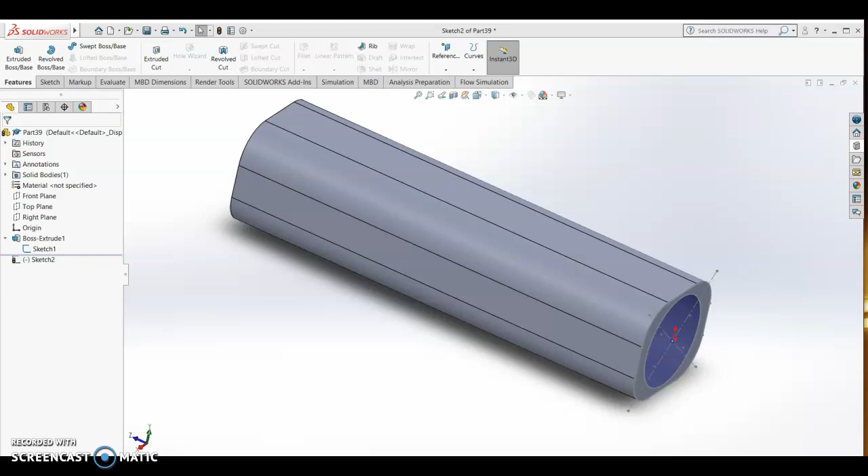In this video, we're going to draw a tie rod end. We know that the diameter of this threaded part of our rack end is 10 mm, so I'm going to make a threaded hole of 11 mm. So open your part. Okay.

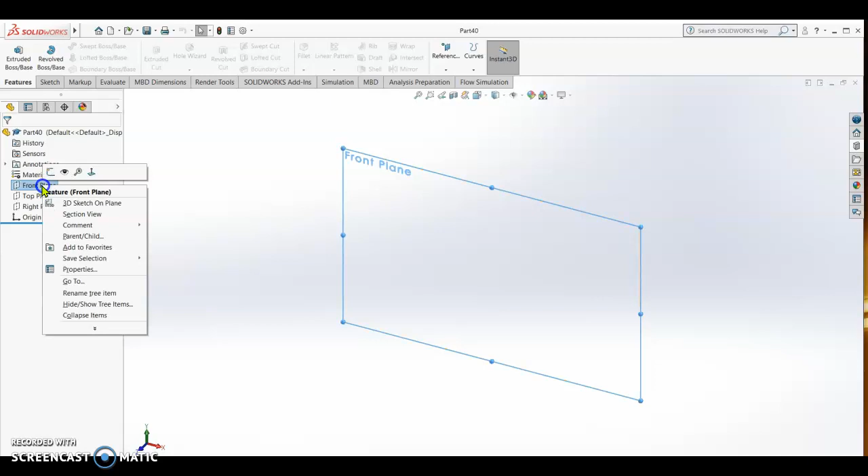On the front plane, we sketch a circle. Okay. Smart dimension, we put in 11. Enter. And then we use this center. We draw a rectangle. We put the dimension here 14, and then we put the dimension here 12.

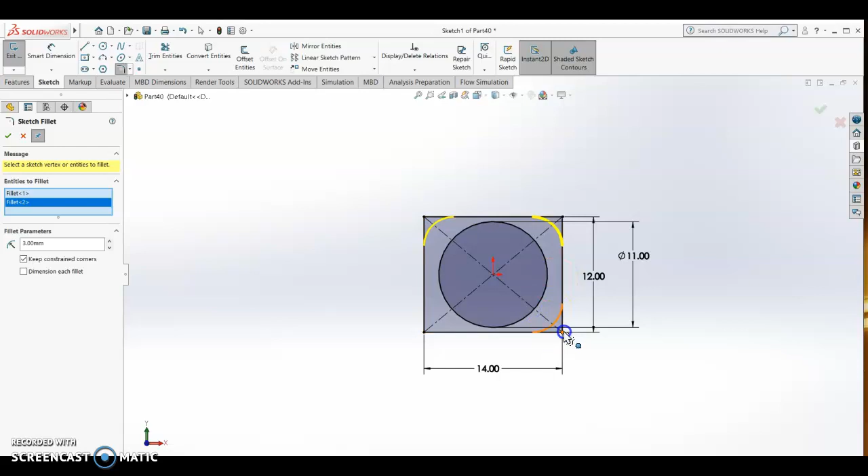Alright. And then we fillet the corners. We fillet it by 3. Okay, 3. Alright, check. And then features. We extrude boss base by 50. Okay, check. So this is our extruded boss base.

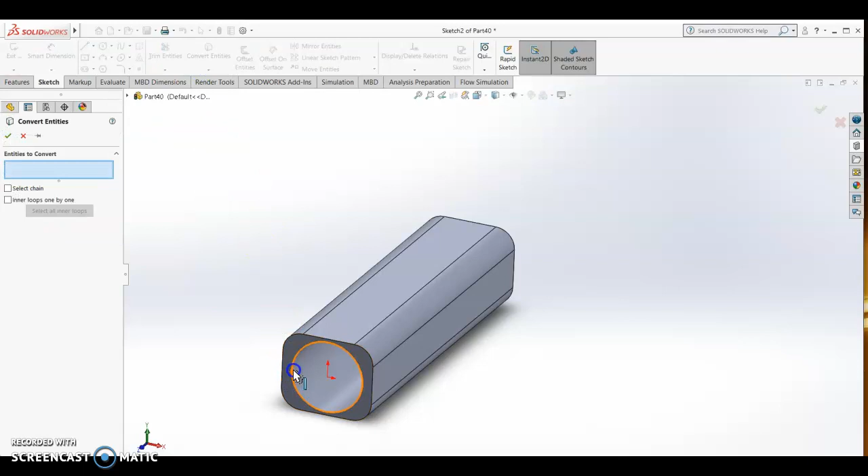So I sketch on the base and then I convert entity on the edge. Check. And then we go to features and insert a helix. The same thing, it's 1 mm pitch. Okay, check.

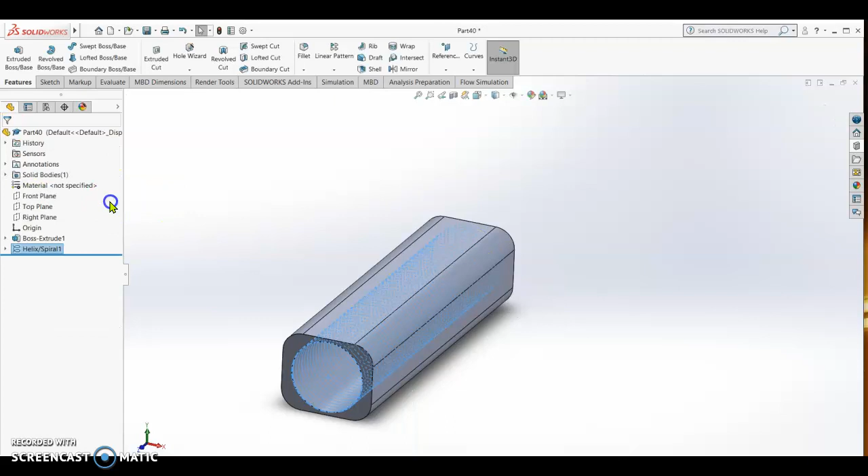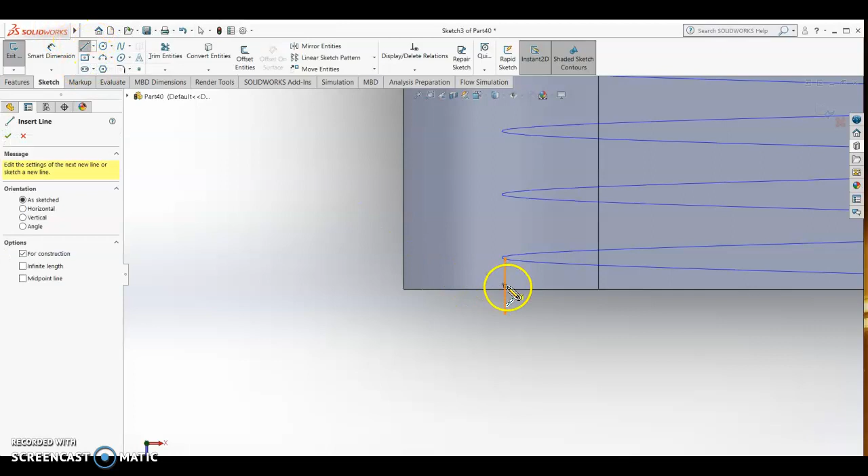And then on the top plane, we're going to sketch the profile of the thread, similarly to what we did on the tie rod or rack end. Okay, normal to. Sketch. We draw a line. The line must be touching this helix. All right, and then we draw a center line. So we put the center. All right, and then we draw a line.

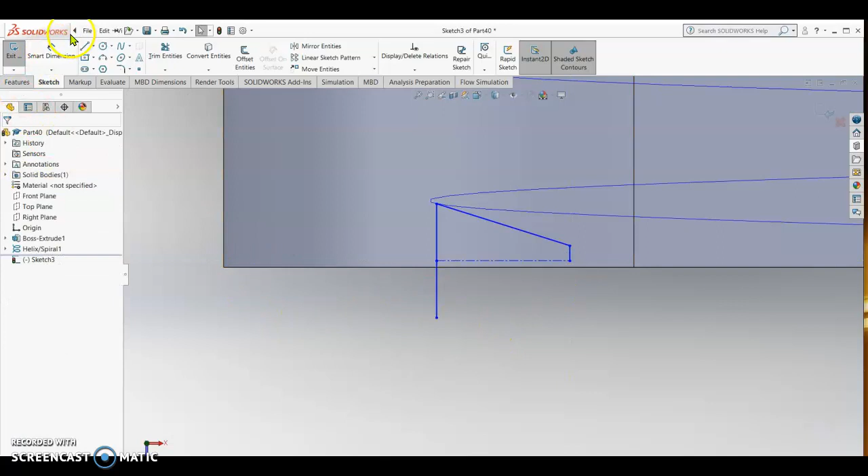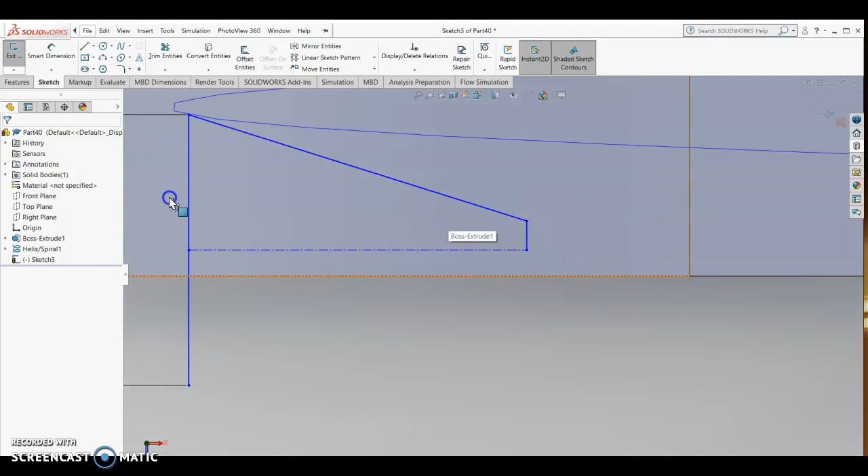So this should be 8 mm, smart dimension. We put this as 8 mm. Wait, undo. It should be 0.8 mm. All right. And then this one should be 0.1, or we just mirror first. So we mirror entities. We use this line, and then mirror about this line.

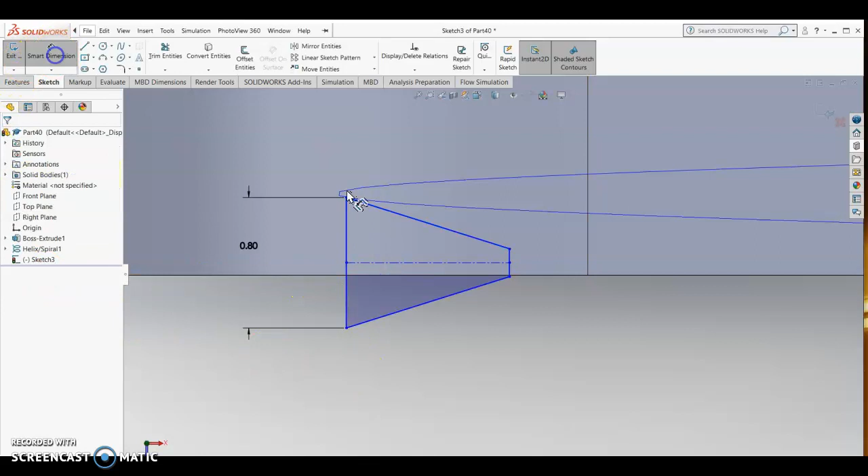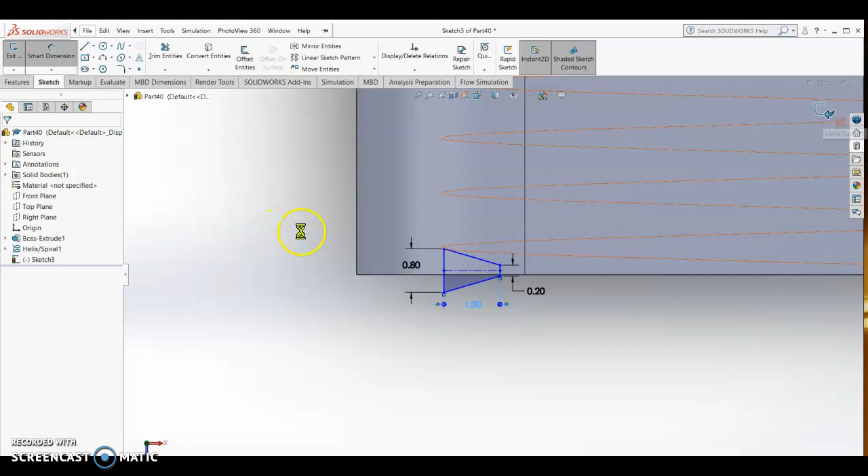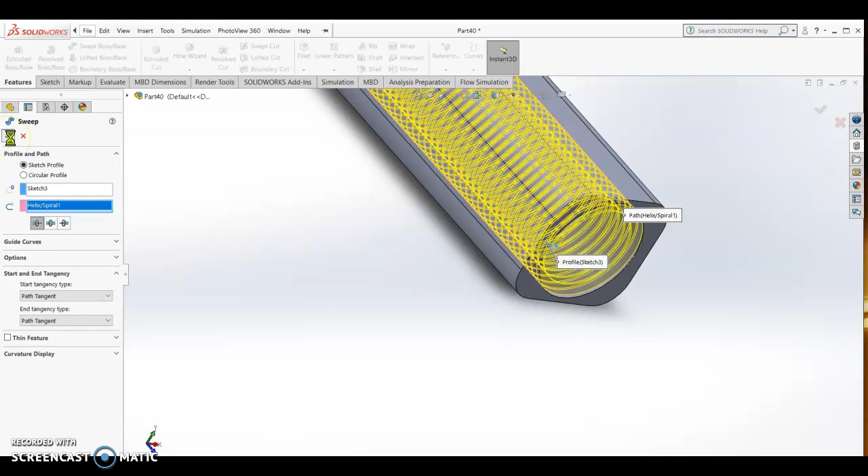Check. Smart dimension. This should be 1 mm, or 0.2. Okay. The height should be 1 mm. Enter. Once done, we close the sketch. And then we go to features, swept boss base, and select the helix. Let's see the thread. Now it's done. Okay, check. Alright, we got the threaded hole on this block.

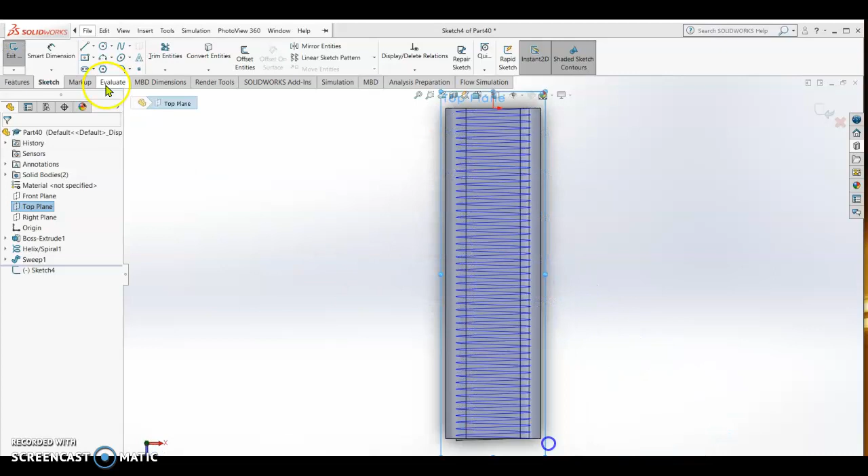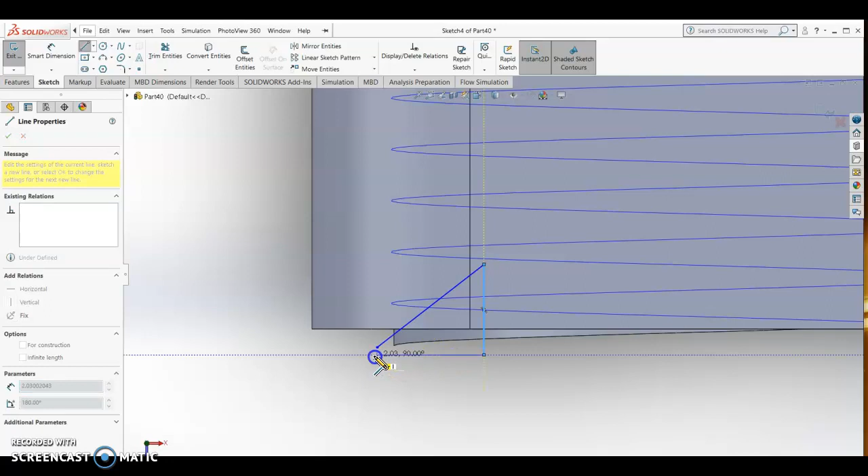Right, we chamfer on one side, so we still sketch on the top plane, sketch, normal to. Then we are going to cut. So I want to cut a line. Okay. So I'm going to draw a center line so that I can make a revolve cut. Okay, check. And then features, revolve cut.

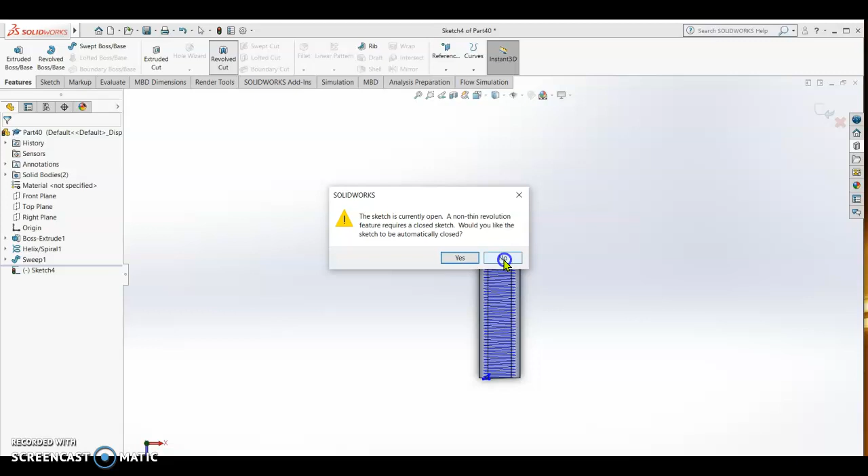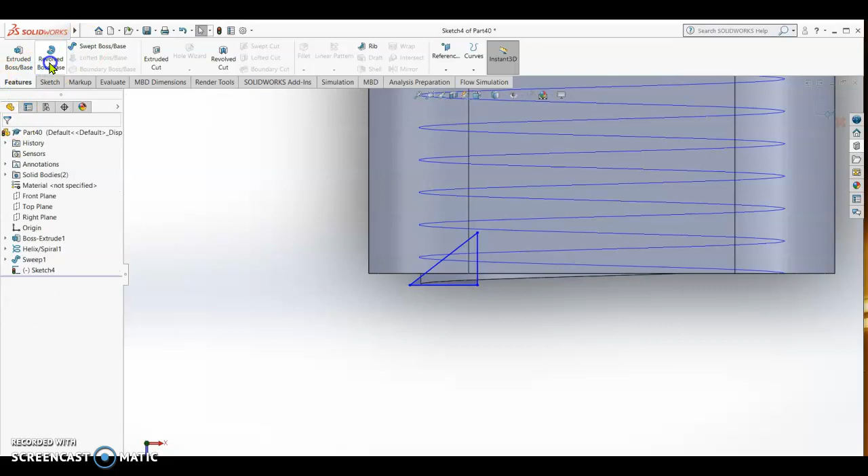Okay. Now we see, oh, it's not connected. So we have to join first. Close. This is the sketch. Let them merge. All right. And then check, and then revolve cut. Okay, it's cut already. Check. So now it is cut.

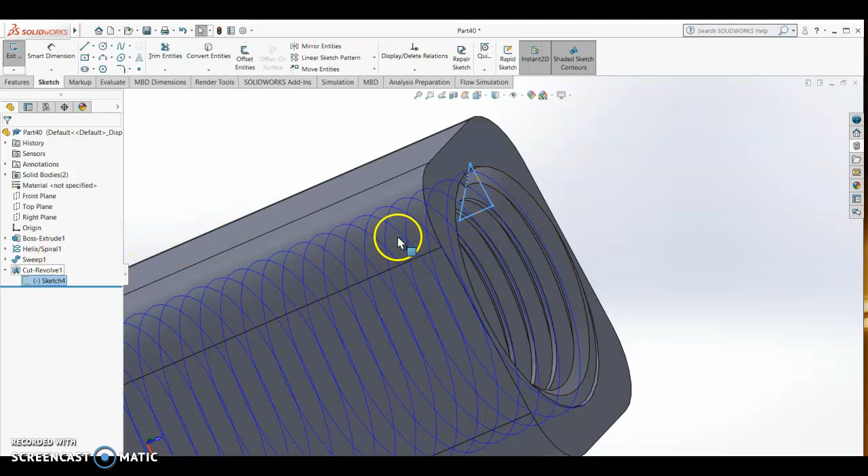Okay, we can increase that cut. We can edit some more. Edit sketch. I want this cut to be deeper. Okay, close. All right. So now it's cut so that the thread will be nice.

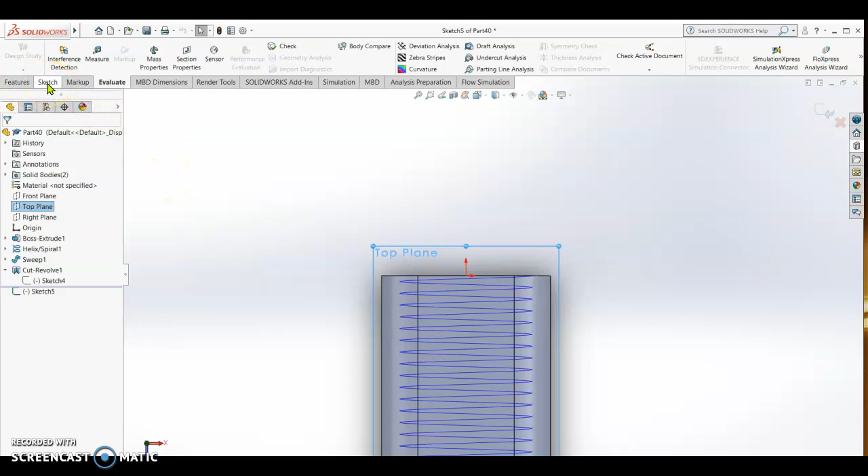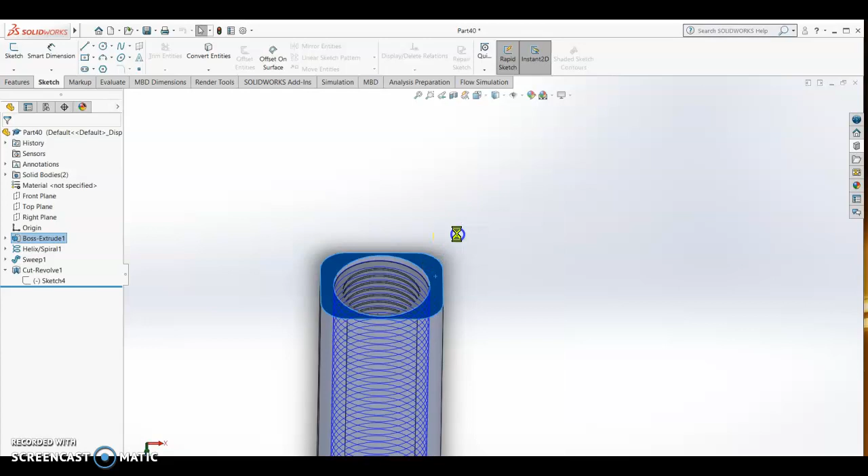Now we can draw the ball socket for the tie rod end. We sketch still on the top plane. Sketch, normal to. We do it here because we cut already on that side. For the ball socket, we are going to sketch a circle. I better extend a bit. Okay, we close the sketch first. And then from here, sketch, and then convert entity.

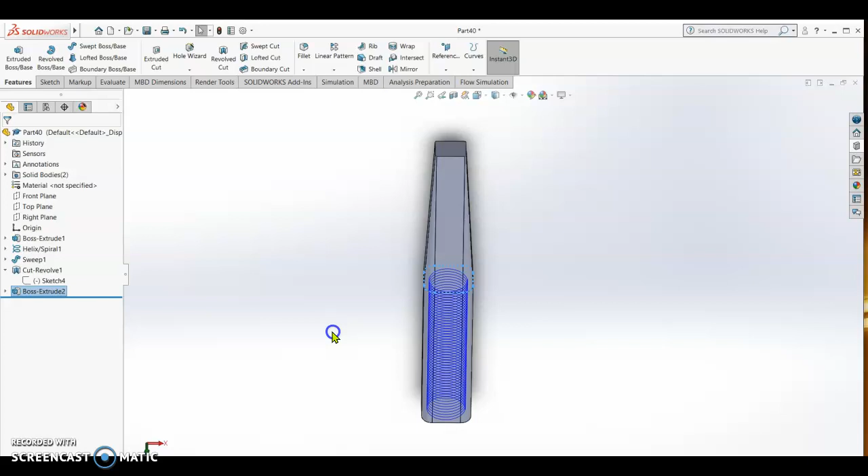And then features, extrude boss. Okay, we put a degree, and then make it, alright, check. So this is my part. Now I can sketch on the top plane for the ball socket. Normal to. Okay. Now sketch a circle.

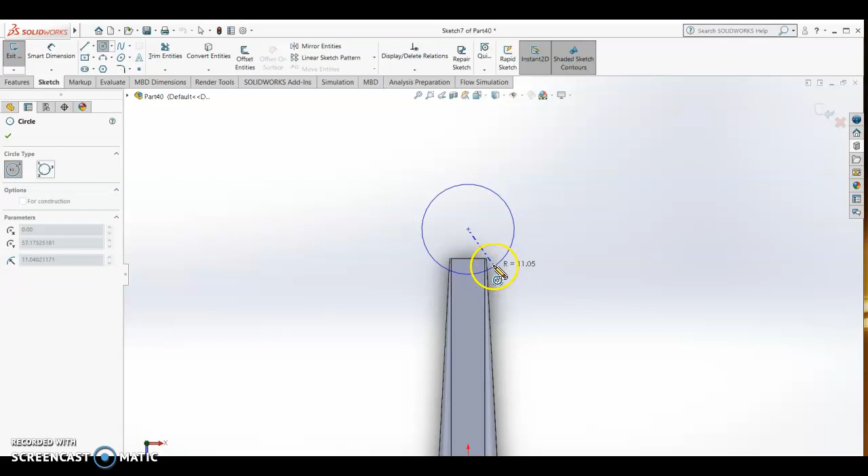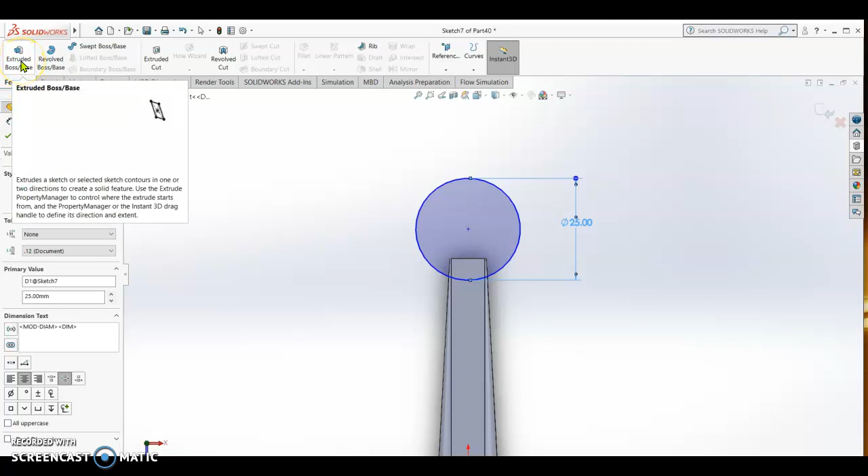I put a diameter of 25. Alright. So features, extrude boss, mid plane, by 25 also. Okay. Check. So this is my ball socket.

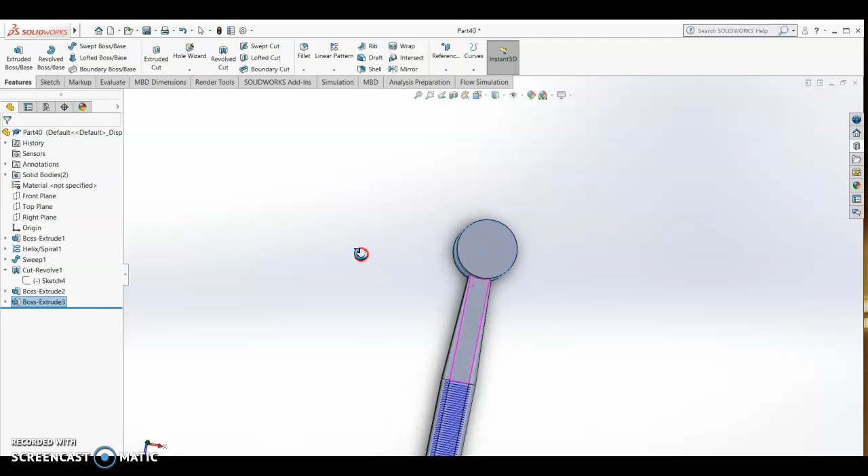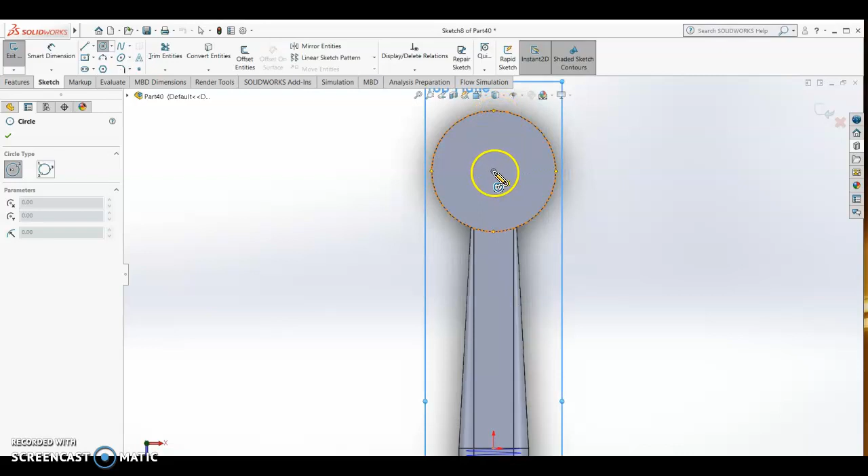Now I'm going to cut the inside. It's still on the top plane. Sketch. Normal to. Sketch a circle. We find the center. This will be the size of the ball of our tie rod end. So we put a dimension of maybe 20 mm.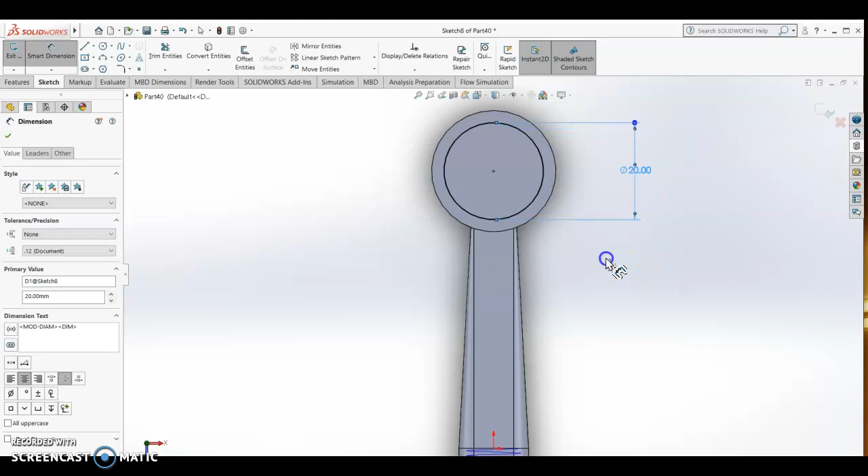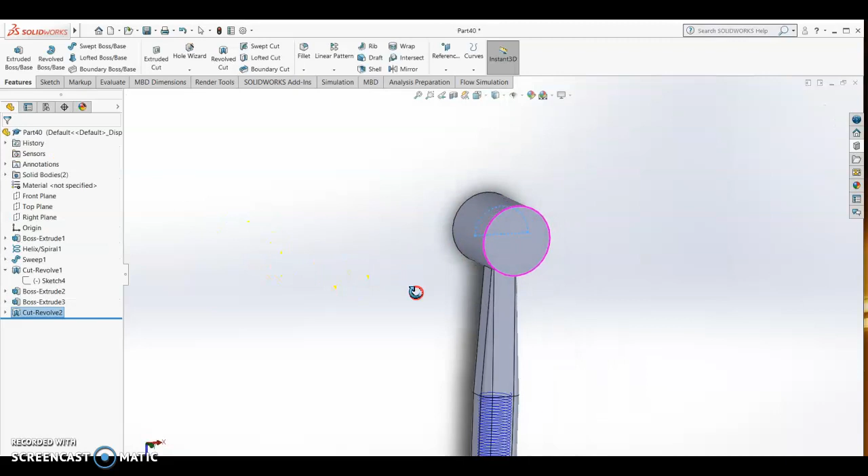Alright, so we draw half so that we can revolve cut. Then trim one side, and then features, revolve cut. We use this side. Okay, check. It's already cut inside. Now we can fillet this area.

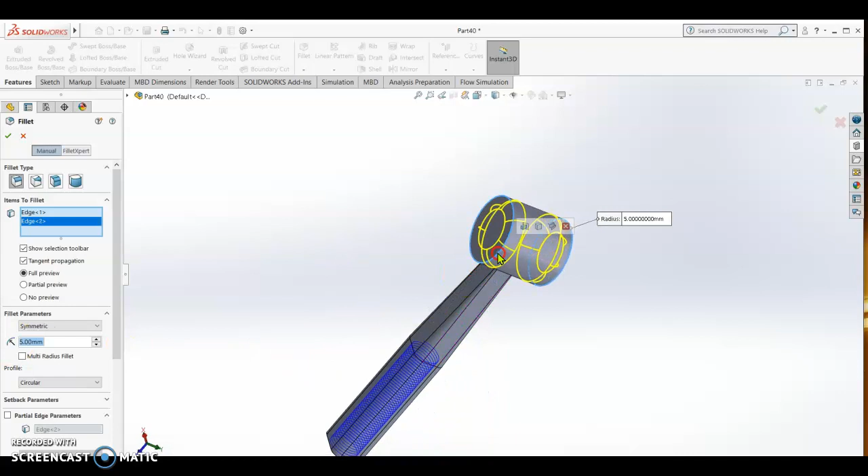Fillet. Okay, we put it only 5. All right, same thing on the other side. We can also fillet this area. That's it on the base. So check first, then we fillet this side too. Okay, and then check.

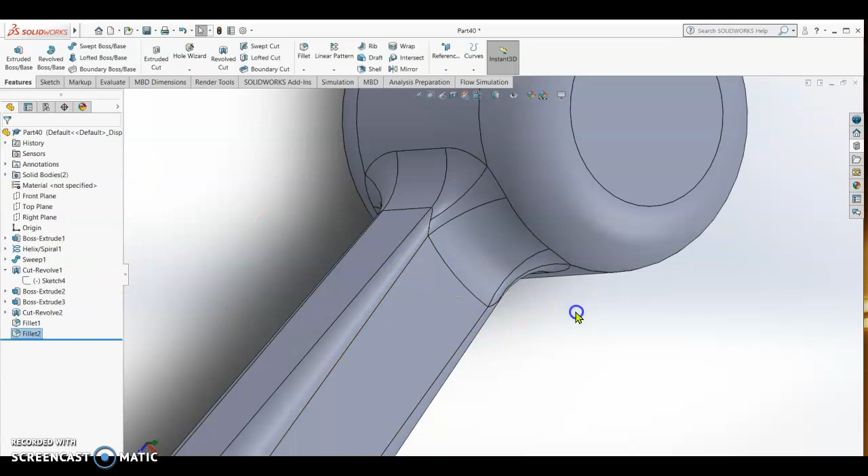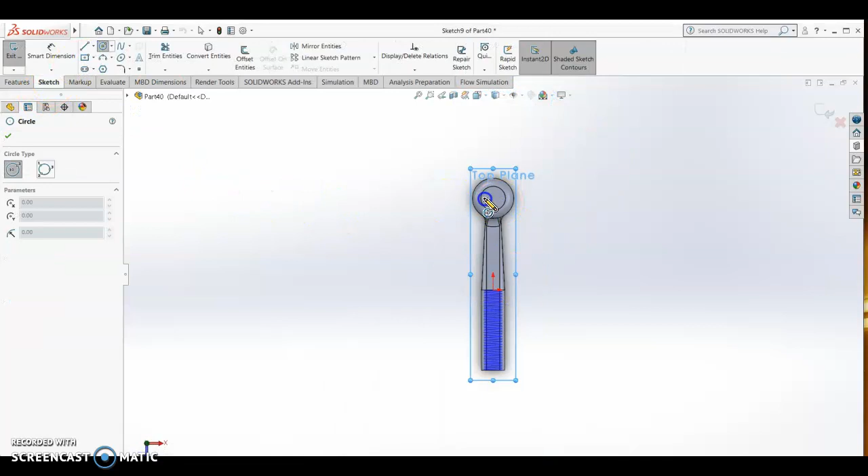All right, now we're going to cut the hole for this one. It's still the same thing. We go on the top plane, sketch, normal to, we draw a circle. It should be less than 20 because we used 20 as the cut. So I put the smart dimension. This is 10.

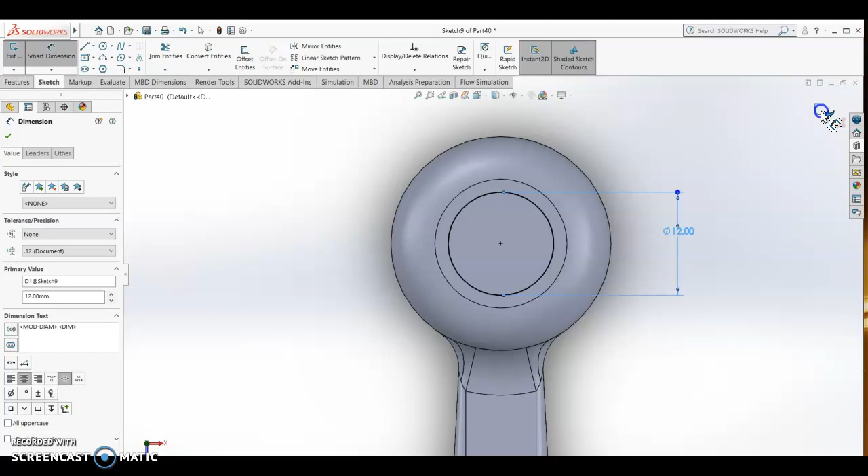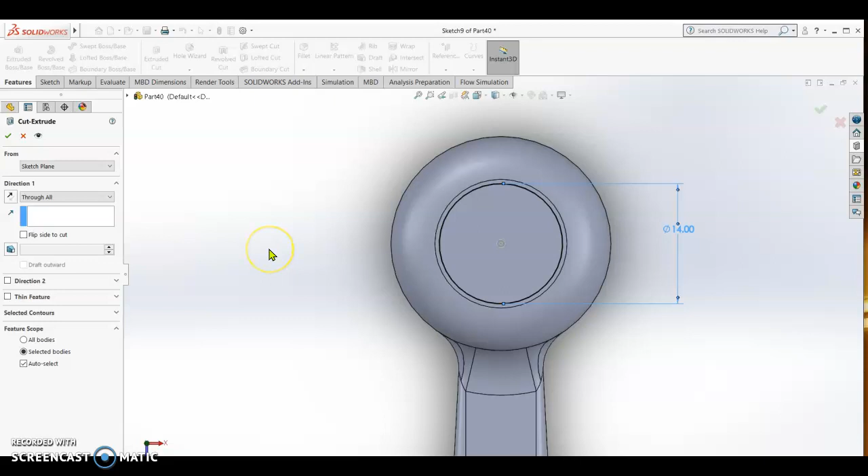If I put 12, let's see. Okay, 12. Or I put 14, I make it a bit bigger. 14. Enter. So this is 14. Then features, extrude cut. Okay, through all. All right, check. So this is now my tie rod end. The remaining part will be the tie rod end ball.